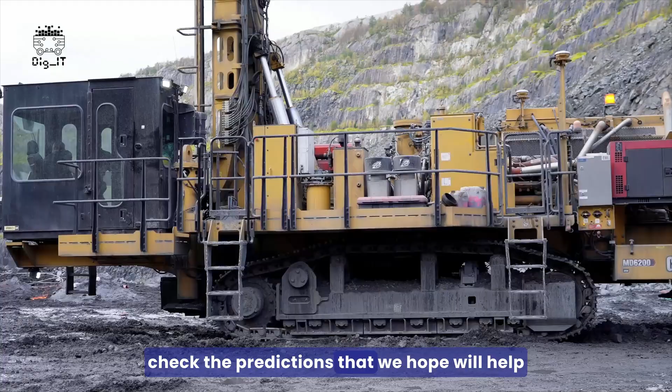The goal of the Dig_IT project is to build an industrial IoT platform for the mining industry. The concept is simple: we gather data and send it to a platform where we integrate different models and AI algorithms to post-process it. Then the raw data and the model outputs are displayed in a decision support system available for the miners, the end users, who can check predictions that we hope will help them manage mining operations.

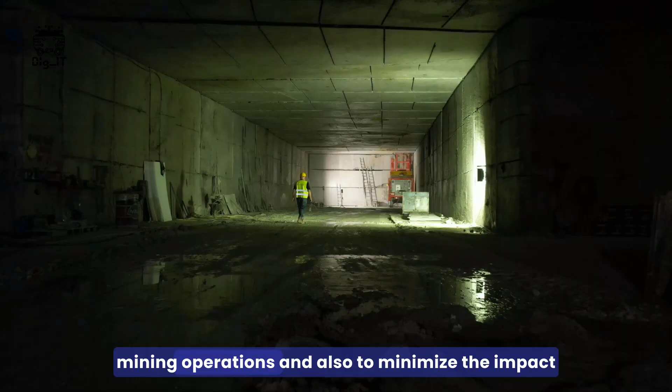With the Dig_IT platform, we aim to improve safety in mining operations and minimize the impact of mining operations on the environment. At the same time, we will work on energy efficiency and operations efficiency in order to improve the benefits of the companies.

The TRL of the Dig_IT platform is around TRL 5 or TRL 6. By the end of the project, our aim is to demonstrate that this technology can help the mining industry. However, there is still a way to go until commercialization or market uptake, and this is our future work.

The DIGIT consortium consists of 16 partners from 9 different countries: ITAINNOVA from Spain, Core Innovation from Greece, Brunel University London from the United Kingdom, Tampere University from Finland, Pro Technology from Italy, Institute of Communications and Computer Systems from Greece, Subterra Ingeniería, now Systra, from Spain, Stratagem Energy from Cyprus, Eurocore Consulting from Belgium, Libra from the United Kingdom, Marini Marmi from Italy, Tapojärvi from Finland, Sintef Norlab, now Nemko Norlab, and its linked third party Sintef Helgeland from Norway, Titania from Norway, Schneider Electric from Italy, and IoT from Germany. Now IoT has been replaced by Centrix Lab in Serbia.

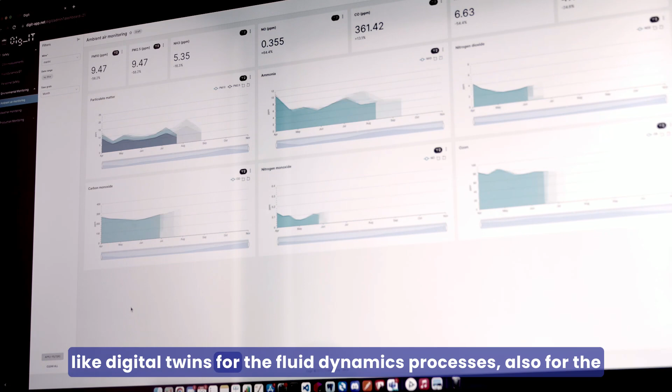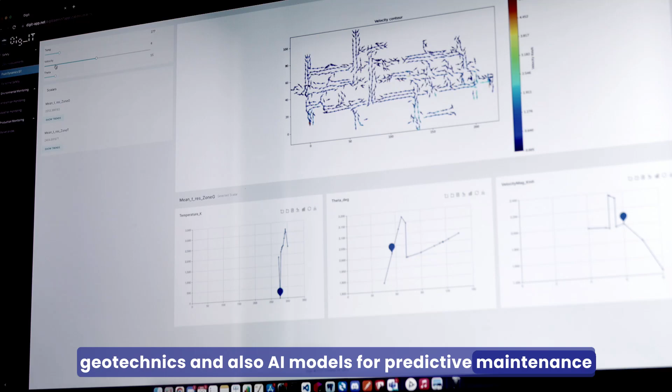In the platform, we are developing different kinds of models, like digital twins for fluid dynamics processes and for geotechnics, and also AI models for predictive maintenance and optimization of mining operations. In the decision support system, we will have dashboards showing all the results.

The methodology that we have developed in ITAINNOVA is very useful, not only for underground constructions like mines but also for buildings. We are also working on different projects assessing ventilation inside buildings like hospitals or residential buildings.

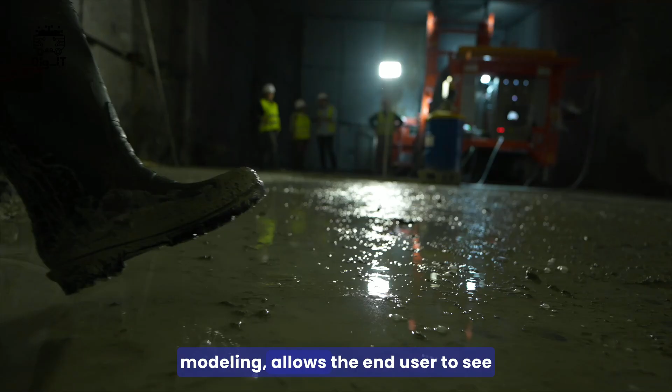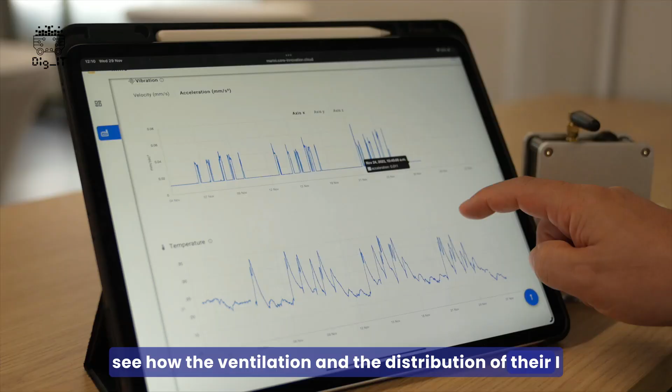The methodology we developed, coupling CFD simulations and reduced order modeling, allows the end user to see how ventilation works inside different scenarios. With this idea, the end user can see how ventilation and air distribution in a closed space can be affected by different parameters, such as ventilation ducts or temperature.

This coupled methodology of CFD modeling and reduced order modeling allows us not only to assess ventilation inside buildings, but also to save energy.

In ITAINNOVA, we have developed a methodology that couples computational fluid dynamics simulations with reduced order modeling. This allows the end user to get a fast response according to different input parameters in the CFD model. Usually, CFD simulations are very time-consuming, so we save this time by building a reduced order model.

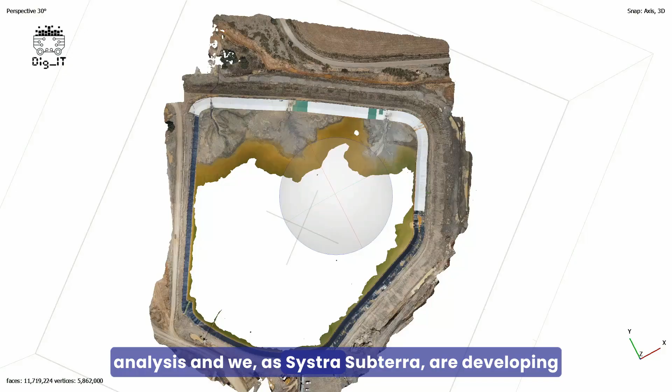I'm Guillermo Vaquero. I'm a mining engineer working in the Research and Development Department of Systra Subterra, and I'm in charge of the technical management of the Dig_IT project. Within the Dig_IT project, we are developing two different technologies: Brunel's team is in charge of the big data analysis, and we, as Systra Subterra, are developing the geotechnical digital twin, which is going to be focused on the tailing storage facility.

The main idea of the Dig_IT project is to harmonize very different technologies, not only related to the mining field, but also to other important fields arising these days, like artificial intelligence or big data optimization.

With the development of the smart garment, we are going to be able to measure all the parameters for the workers working in the mine, not only on the open pit, but in the underground areas, which are critical to increase and enhance their safety.

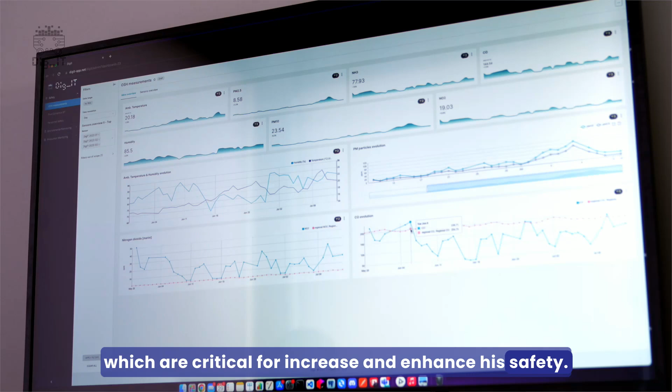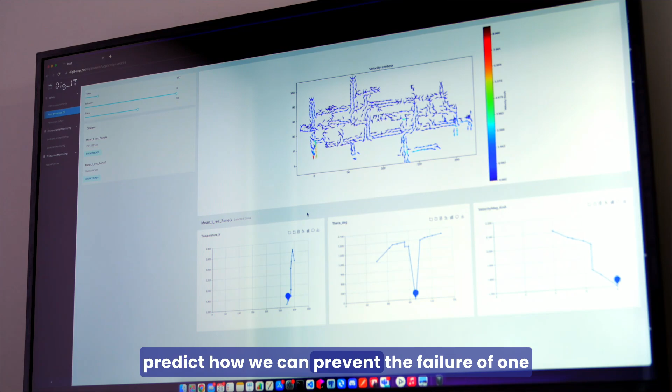With the predictive operation and predictive maintenance, we are going to be able to save money for the companies, as we are going to be able to predict how we can prevent the failure of one machine or different machines, etc. With the smart scheduling framework, we are going to be able to develop better predictions for operation, but also very important data for end users, which are the production data.

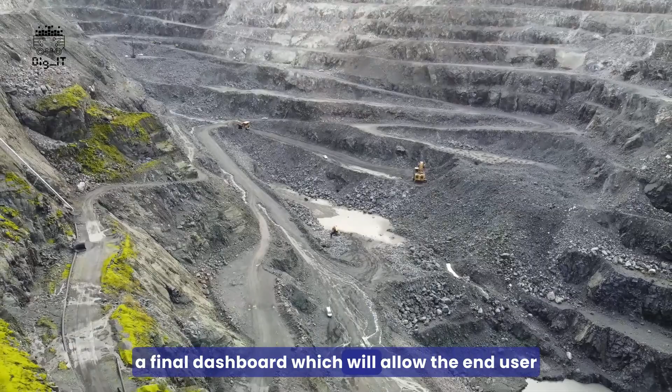All these technologies are going to be integrated in a decision support system, which is going to be a final dashboard, which will allow the end user to check in a very simple way how all these technologies described before are working in the mine in a very fast and very optimal way.

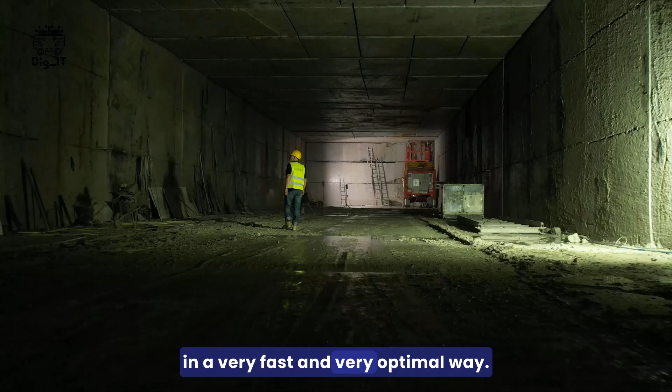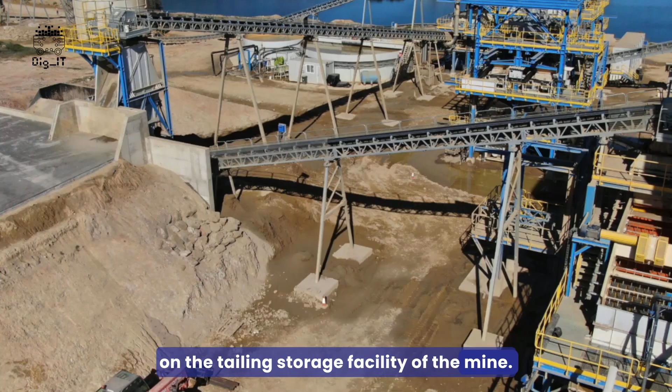Systra Subterra is in charge of La Parrilla, which is a mine located at the central part of the Iberian Massif, located at the southwestern part of the Iberian Peninsula. There we are developing several works, mostly focused on the tailing storage facility of the mine. In the tailing storage facility, we have installed 3 different sensors, which are located in pairs. Let's say we have 3 different boreholes, and each borehole contains 1 piezometer and 1 earth pressure cell.

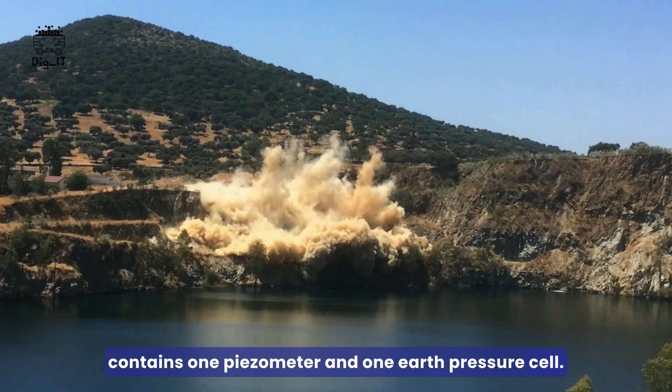These sensors are going to serve us to connect our digital twin to give it a sense of real digital twin, which is going to be a geotechnical model giving us results in true real time. In order to properly develop these 2 technologies mentioned, we are receiving real-time data on a daily basis. We are analyzing this data periodically, and we are integrating it into our digital twins.

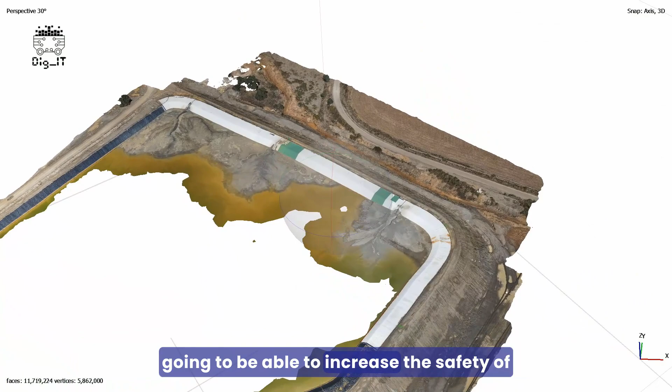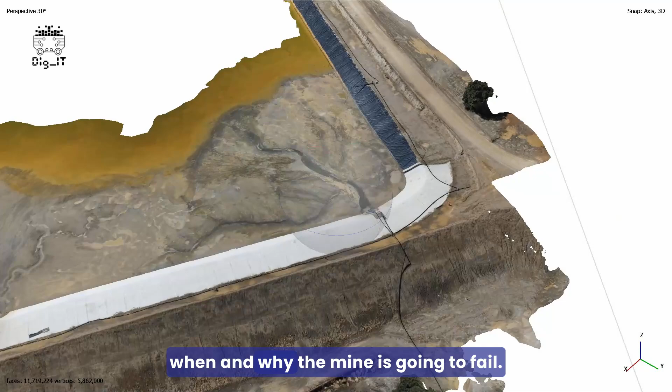Brunel's team is analyzing this data to give it a big data analysis, so it can help us correlate our geotechnical digital twin with the outputs of the big data analysis. With the implementation of these 2 technologies, we are going to be able to increase the safety of a critical mining facility, which is a tailing dam facility. So this is going to help the mine to decide when and why the mine is going to fail. Maybe the dam is going to get broken because of the tailing disposal or any drainage failure.

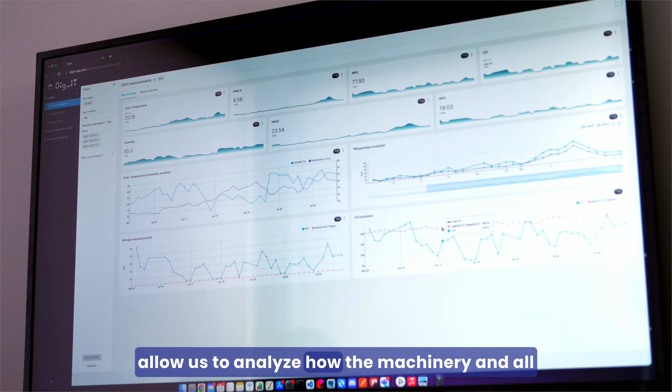We are going to develop 3 kinds of different digital twin models. The first one is going to be focused on the digital twins of assets, which are going to allow us to analyze how all the machinery underground and also on the open pit are functioning, giving us real-time data.

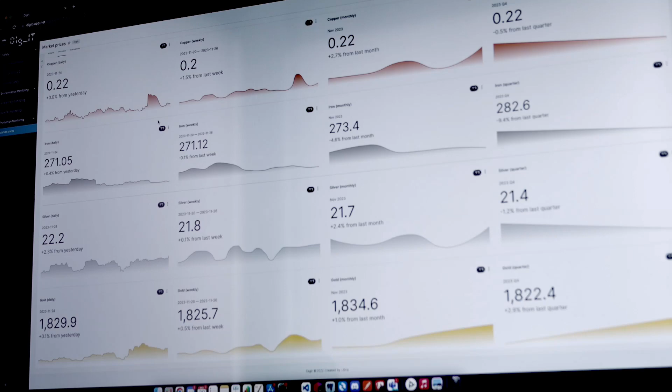With the geotechnical digital twins, we are going to be able to analyze, for example, how pore pressure of groundwater is going to end in a failure of the slope in the open pit, but also in a critical structure like a tailing dam area. With the fluid dynamics digital twins, we are going to be able to develop and simulate how gases are moving within the underground areas by analyzing the measures recorded by the sensors installed there.

We, Systra Subterra, as mining engineers, think that the project will help the mining of the future, aggregating different technologies from very different fields related to mining or geotechnical engineering. We are going to secure the mining in the upcoming years.

My name is Isis Flokas. I'm a data engineer in Libra AI Technologies, and in Dig_IT, my role is to be the technical manager for the tasks of Libra. I'm here from the start of the project, and we are working on two specific tasks. The one is the decision support system, and the other one is the development of a spatiotemporal person and asset tracking system that will create early collision warnings for trucks and people in the mine.

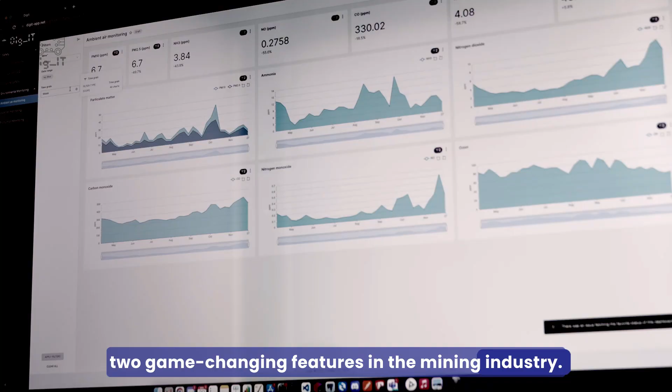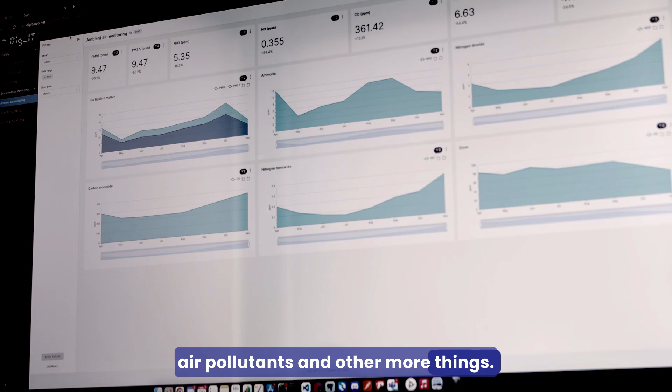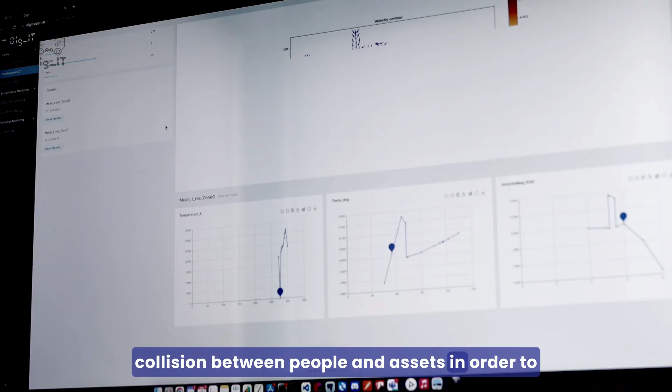The Dig_IT web-based decision support system brings two game-changing features to the mining industry. Firstly, it supports a fully integrated BI system which users can use in order to get insights about their productivity, monitor air pollutants, and more. Secondly, the decision support system features a real-time alerting system that can help people get awareness of various situations in the mine, in order to prevent collisions between people and assets, to achieve safety regulations compliance, and many more things.

The DSS platform is contributing to the project by increasing the sustainability and the efficiency of the mining operations, and giving the end users the ability to follow all the different actions that are taking place in the mine.

My name is Marte Kristine Tøgersen. I'm the R&D manager at Titania, and I'm also the project coordinator for the Titania group in the Dig_IT project.

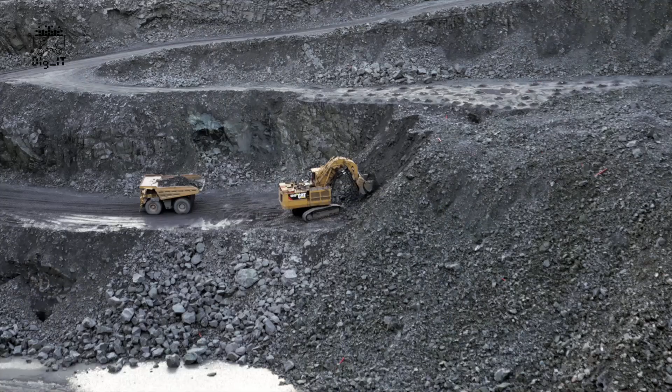The main focus of Titania in the Dig_IT project has been stability of the open pit, assets monitoring, and environmental monitoring. Titania has a stability challenge in the open pit, and that means that we have a lot of sensors and a lot of data collected from the open pit to make sure that everyone is safe who is in the open pit, and that we make sure that we have access to all the different levels that we need at all times.

Our challenge regarding this is that we have a lot of data from different sources that we need to collect together to be able to interpret whether there's a failure going to happen or not. The Dig_IT project will help us with optimization of all this big data by gathering them together and improving our decision support system. The aim of the assets monitoring was to create a better system for predictive maintenance of the mining machines in operation.

Titania's challenge related to environmental monitoring concerns water and dust. We have a water discharge from our open pit down to the fjord, which sometimes contains solids and nickel. In the Dig_IT project, we have a sensor that measures turbidity, and we will use it as a proxy to determine whether we'll have nickel in our discharge.

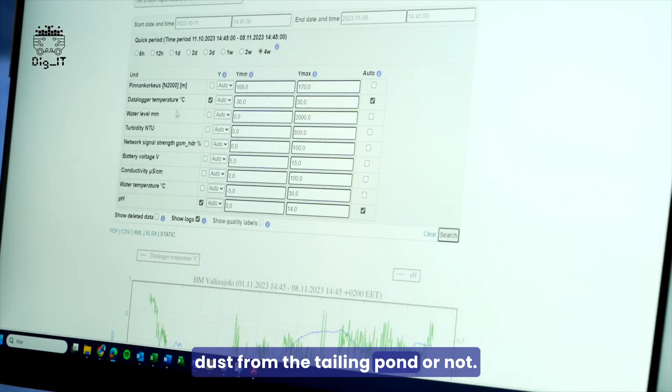Sometimes we have dust going from our tailing pond into a village nearby. We have dust sensors in this village, and we will also, with the help of SINTEF Helgeland, a partner in the Dig_IT project, create a website where the villagers can see if it's going to be dust from the tailing pond or not. Another aspect of the Dig_IT project in Titania is Smart Garment. Smart Garment is a useful tool to ensure the workers' safety and health.

The most important actions taken by Titania in the Dig_IT project has been providing relevant data to the partners and aiding them in their work in developing the Internet of Things platform. The most time-consuming and fruitful part of the Dig_IT project for Titania has been the work with the life cycle analysis. There we have collaborated with SINTEF Helgeland and done a Scope 3 LCA. Scope 3 LCA means that we have taken into account all our direct emissions, energy consumption, water consumption, etc., but also all the emissions from making our mining machines and all our consumables like chemicals and explosives, etc. Everything is in the Scope 3 of the LCA.

The technological innovations that our use case brings is the big data optimization, the digital twin for the stability in the open pit, and the digital twin for the environmental monitoring. All of this will improve our decision support system. Since Titania is an end user in the Dig_IT project, we have collaborated with almost all the partners, and we have gotten networks throughout Europe in the mining industry.

With ITAINNOVA and Nemko Norlab, we have collaborated on environmental monitoring. With Subterra and Brunel, we have collaborated with stability in the open pit and the big data optimization. With SINTEF Helgeland, we have collaborated on the LCA and the communication with the community. With Schneider, we have collaborated about the data handling, and with ICCS and IoT, we have collaborated on the smart garment. We have never been part of a project this scale before, and we have learned a lot by collaborating with so many different partners.

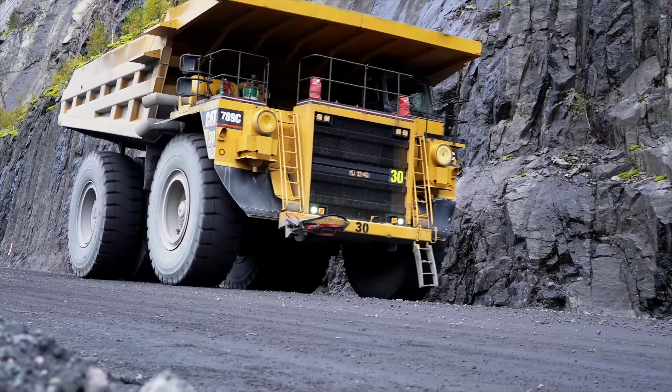Tapojärvi operates and develops sustainable solutions for several process industries, mining industry being the most significant one. Tapojärvi aims to become the world leader in industrial circular economy by 2035. European Union's Horizon Cooperation Programme and Dig_IT project are important for Tapojärvi to find and utilize the best expertise in research and development for new sustainable innovative solutions.

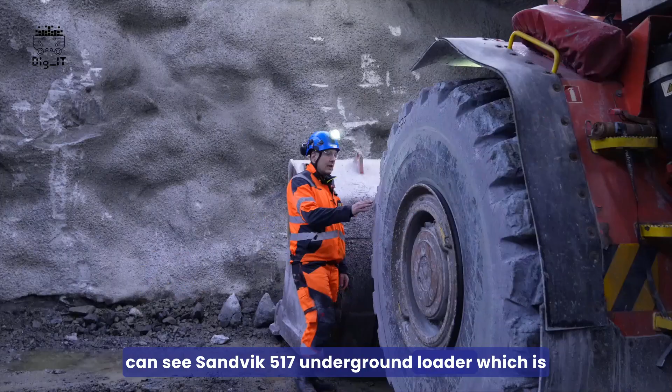My name is Markus Partanen and I work as a maintenance manager at Tapojärvi Company. Tapojärvi Company is a contractor here at Kemi mine, which is owned by Outokumpu. My role in this Dig_IT project is to be project manager from our side. And in my background, we can see a Sandvik 517 underground loader, which is a part of this Dig_IT project.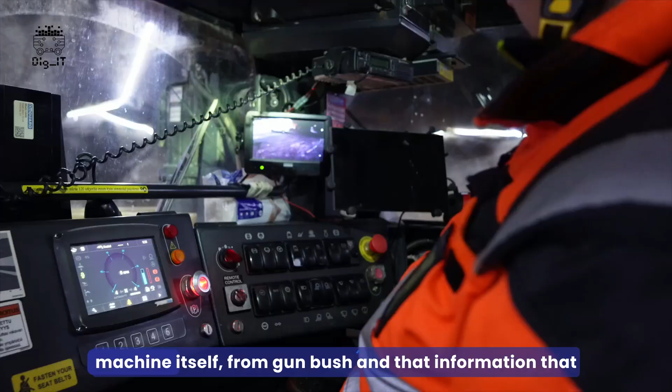There have been some installations on these machines, and we are getting information to the DIGIT project from the machine itself, from the CAN bus, and that data is shared with the 5G network to the DIGIT server. Tau is developing that data, and we are getting a lot of information about how the machine is working, and maybe important information so that we can predict failures for predictive maintenance.

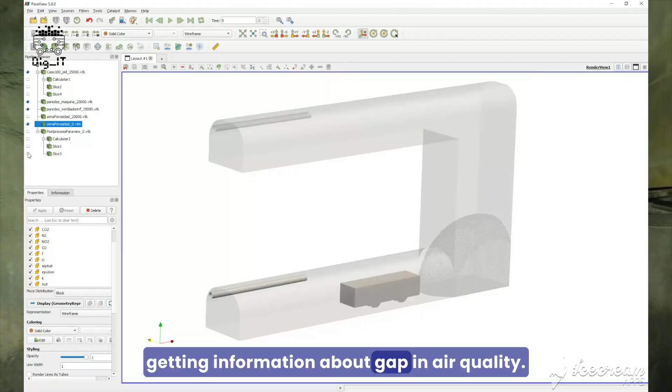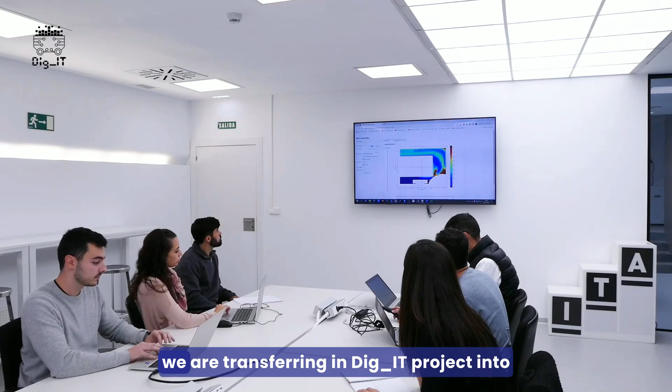Then there are also external devices installed which are measuring CO2 levels, and with that data, of course, drivers are getting information about cabin air quality, but we are also getting that data to the server, and we can see what kind of environment and air quality is in the cabin where our employee is working. All the data we are collecting, we are transferring in the DIGIT project into the database, and other parties in this project are developing and researching that data.

In a modern and sustainable world, we have to keep workers safe. So we have developed a smart garment in order to make wearables for a safe environment. The smart garment consists of the bracelet on the hand of the worker, the earplug on the head of the worker with speaker and microphone, and of course the main garment, which is a box that is with the worker and concentrates all the measurements in order to send them to the DIGIT project platform.

We are very proud of developing a device that is connected to an IoT platform, but at the same time applies edge computing approaches. We're very proud because this device will be a first and initial stage to make commercial use of safety devices in the workplaces.

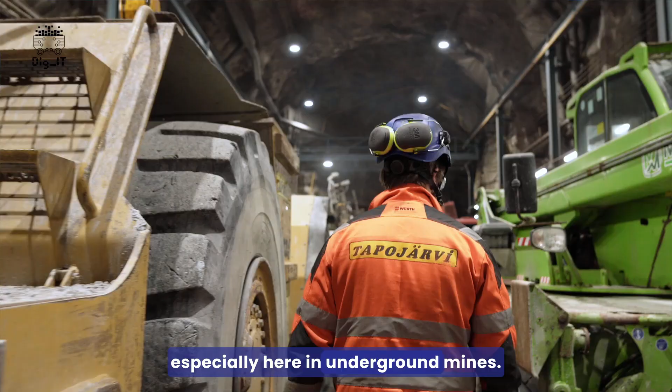I'm Jarkko Raappana from Tapojärvi, and we have been using these smart garment sensors here in Finland since April. And we wanted to take part in this project because we really think it has a future application in safety, especially here in underground mines. The data we have been gathering has been distributed to our other partners here in Europe and other countries as well. We've had a couple of workers using these sensors, and the data we've had from them has been good, and the usability is great.

My name is Jaana Koivumaa and I am a manager at Hannukainen Mining. We have been involved in this DIGIT project since we started to think about the borders here in this area. And I was one of the group which was planning what to do. Tapojärvi was involved in the DIGIT project already in the beginning, and they asked us if we had any needs.

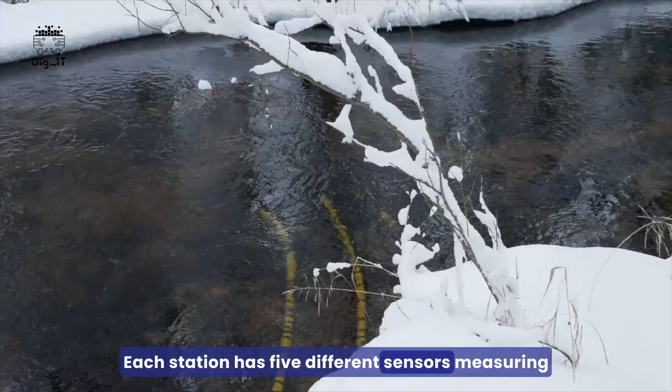We need to have a lot of information about local rivers and water quality before we start mining. In this project, we installed 5 online stations on 4 different rivers. Each station has 5 different sensors measuring water level, pH, temperature, conductance, and turbidity. So DIGIT will give all this information to us.

My name is Tuomas Lahti. I'm the environmental engineer at Hannukainen Mining. In this DIGIT project, the goal for us was to improve the usability and reliability of the data we collect from the measurement stations in Hannukainen. Because the data quality we collect in the winter is unsure, in this project, with the help of SINTEF, our aim was to improve the quality and usability of that data.

And also one of the main goals was to get the data public so we can share it with the people. Lots of mines are located in cold climates, and online monitoring has become more and more important in environmental issues. And in Hannukainen we can provide the online measurement data and the station for this project to improve the quality of the monitoring, especially in winter conditions where the temperature can go below -30 degrees, there can be lots of snow, and the rivers get frozen.

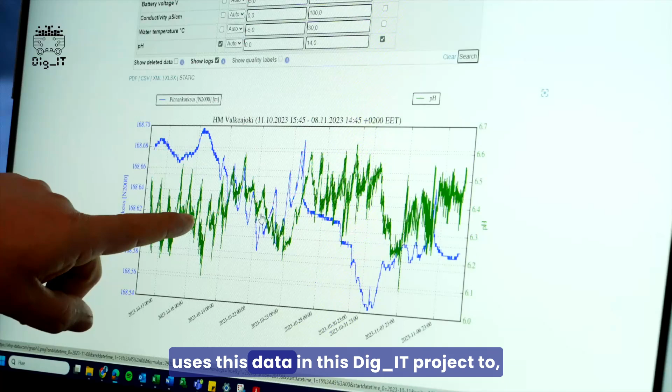This is one of the stations that we use to collect the data in the waters and rivers here in Hannukainen, and this one is installed in Valkeajoki. There are sensors at the bottom of the river that measure, for example, temperature and pH. We collect this data to the cloud, where SINTEF uses this data in this DIGIT project, for example, to create graphs for us on our website.

We hope that in the future, with the results from the project, we can improve the monitoring results and the data from our stations, especially in the winter. And hopefully we can also improve the environmental monitoring and the tools for monitoring in the mining industry in general.

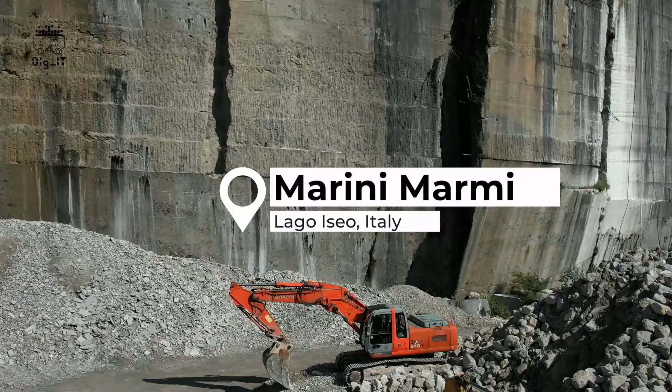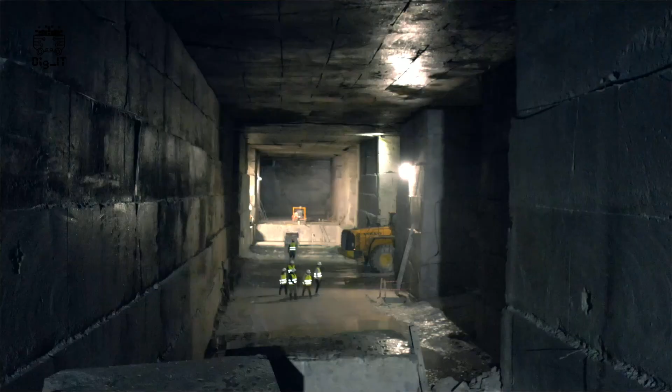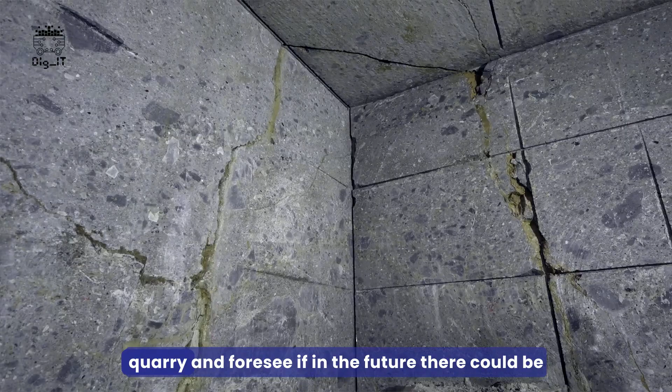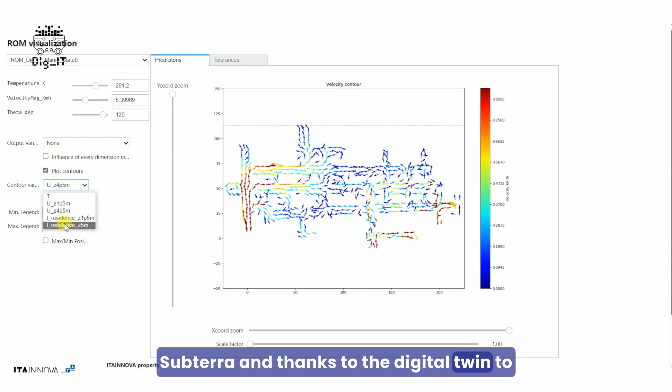I am Giulio Marini, owner and CEO of Marini Marmi company. Our main goal in the project is to improve safety in our sector and reduce waste of material, in particular with regards to the detection of cracks inside the quarry and foreseeing if in the future there could be the necessity to have forced ventilation. These two problems are meant to be solved thanks to the geotechnical digital twin carried out by Subterra and the fluid dynamics digital twin carried out by ITAINNOVA.

My name is Karina, and I'm working at the Nemko Norlab situated in Norway, where I am manager of the Department of Environmental Monitoring. My role in this project has been to make these sensor bundles for air monitoring. I've been working with the Marini and the KMA use case and with developing the air quality sensors.

It has been very important for us to develop the sensor bundles in such a way that they're cheap to produce and can deliver data of good enough quality. They are delivering a data stream to the project so that they can use that for further processing.

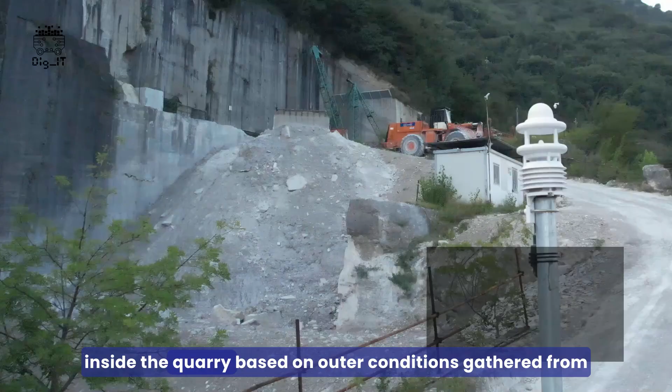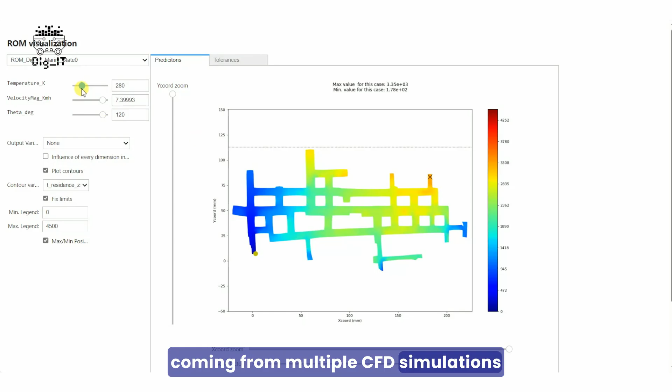I am Matteo Moioli, member of the Marini Marmi team. Several actions have been carried out on our use case. ITAINNOVA will generate a ventilation digital twin based on our quarry, which will predict real-time properties inside the quarry based on outer conditions gathered from a weather station that has been installed. This digital twin is being built using data from multiple CFD simulations that are being validated using data from anemometers and internal sensors in the quarry.

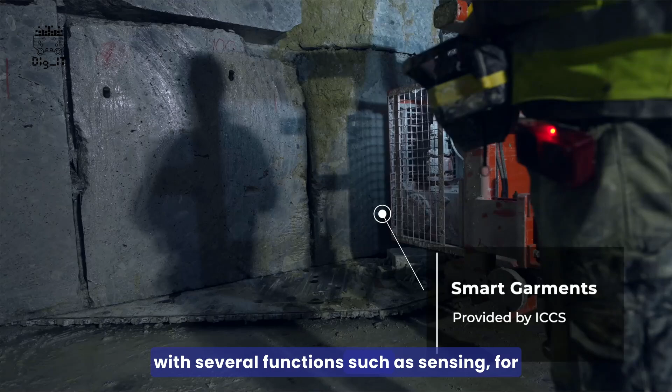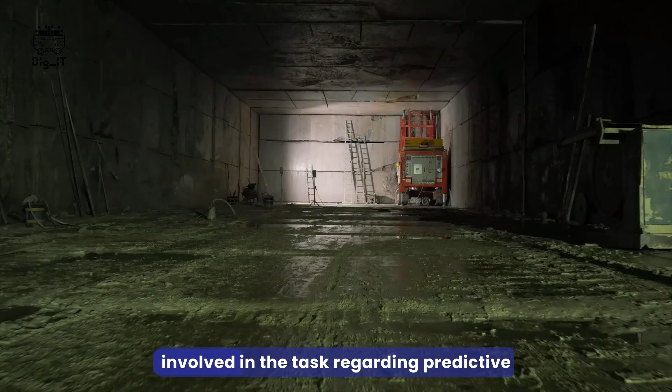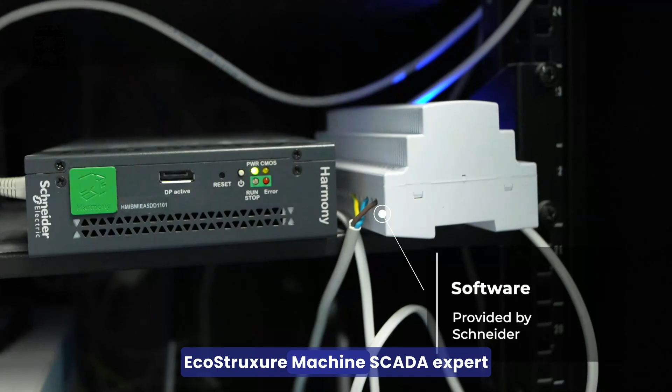ICCS has designed smart garments with several functions, such as sensing skin temperature, air quality, localization, and communication, for example, the headphones. With Core Innovation, we have been involved in the tasks regarding predictive maintenance agents and the predictive operation system. For predictive maintenance, Core Innovation has installed sensors on the machine, while for the predictive operation system, we are retrieving data from the machinery. The architecture is based on Schneider Electric software EcoStruxure Machine SCADA Expert. This software collects data from the field via different protocols.

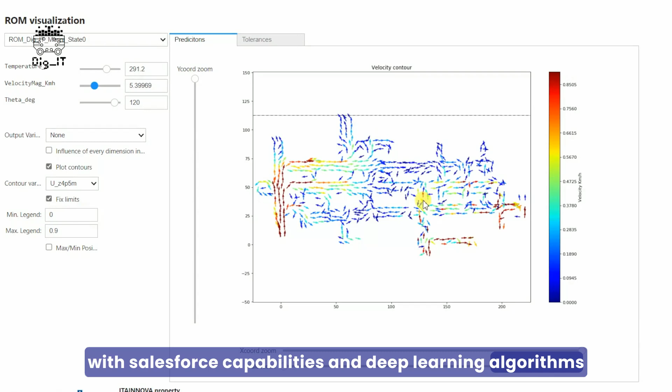So, the Core solution that was deployed in the Marini quarry is an all-in-one predictive maintenance platform. It's a solution that has an edge device with sensor capabilities and deep learning algorithms that help predict anomalies in the operation of the machine. In the case of Marini, it was installed in the gangsaw machine, a machine that cuts marble blocks, and it's a key machine of the quarry.

The user interface used in the solution was also given to the Marini operators, and they were able to follow the critical warnings displayed in the user interface. In the last month of the project, there were some critical warnings in the machine shown in the user interface, and these warnings actually predicted a fault in one of the assets of the machine.

The Marini operators were notified early on, and they were able to halt the machine operation and prevent further damage to the machine. This really helped Marini reduce downtime and save money from potential further damage to the gangsaw machine.

During this project, we have met a lot of interesting partners, and we have learned more about the technology we are using. So for us, this has been a really nice path to walk along with the partners in the project.